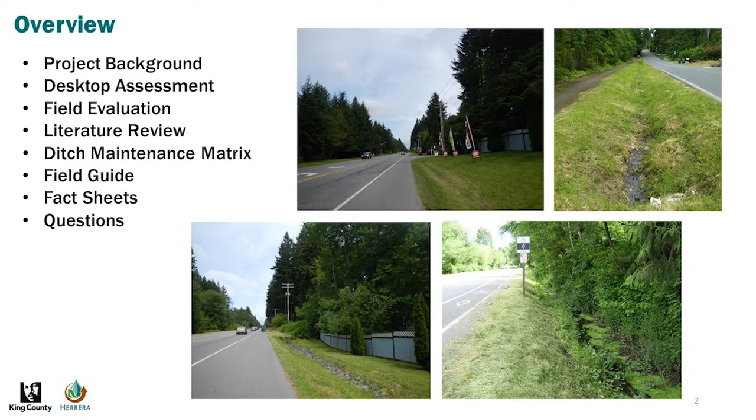This presentation will be covering the study processes and the various study work products, broken out by the following areas: the desktop analysis assessment, field evaluation, literature review, ditch maintenance matrix, field guide, and fact sheets.

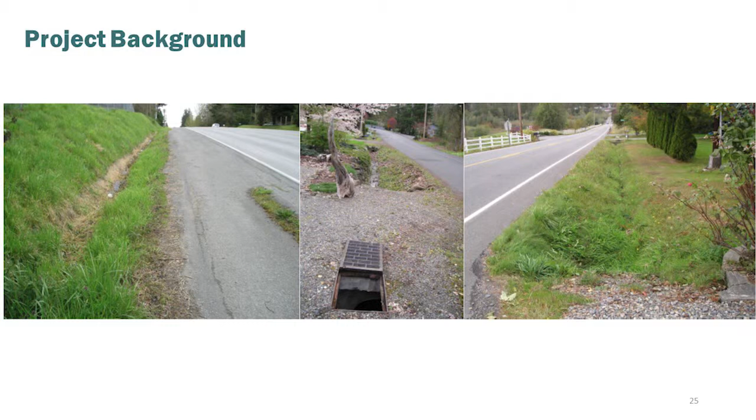Roadside ditch maintenance, this program, this study has been a pet project of mine for a number of years. I used to work in roads maintenance and was responsible for this. We often see this as an overlooked and underfunded aspect of stormwater management programs. Much of the work done to maintain roadside ditches is done through the perspective of maintaining the traveled surface or the roadside prism. But ditches are also stormwater conveyance structures, and for counties they comprise a large part of our conveyance system. For King County, over 70% of our conveyance system is roadside ditches.

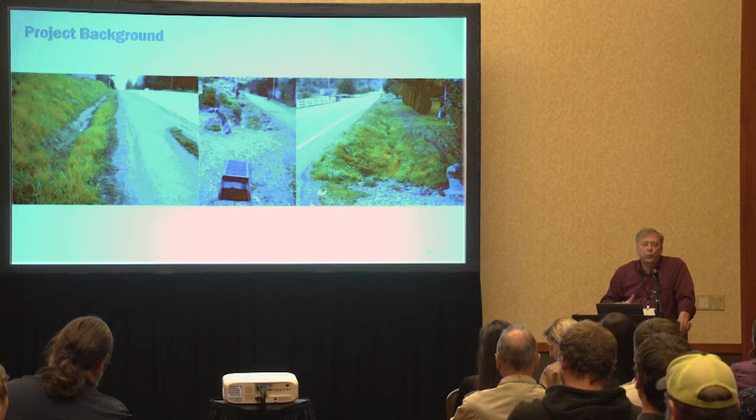The first step of this project was to conduct a literature review of local and national ditch maintenance resources to identify ditch maintenance practices. We then brought in King County road maintenance crews, and we involved Roadmap, a regional roads maintenance group looking at how to implement stormwater management practices for the roads departments. They filled in gaps that we had and reviewed all of the work products and processes that we were developing.

The next step was to develop a desktop assessment and field evaluation of a number of ditches in King County. The information gathered from the desktop assessment and field evaluation, along with the literature review, was used to develop content for the ditch maintenance matrix and the ditch maintenance field guide.

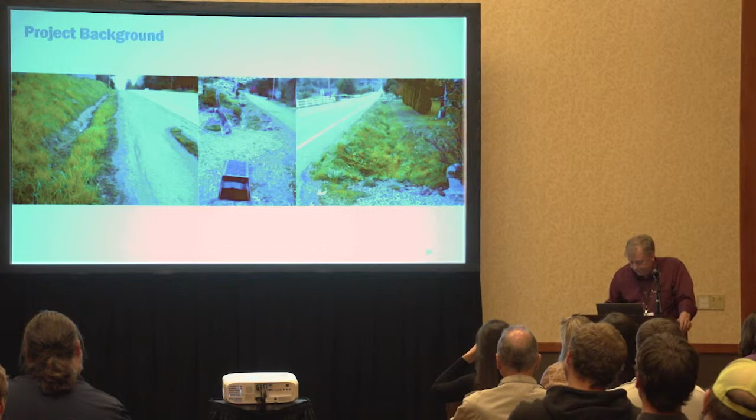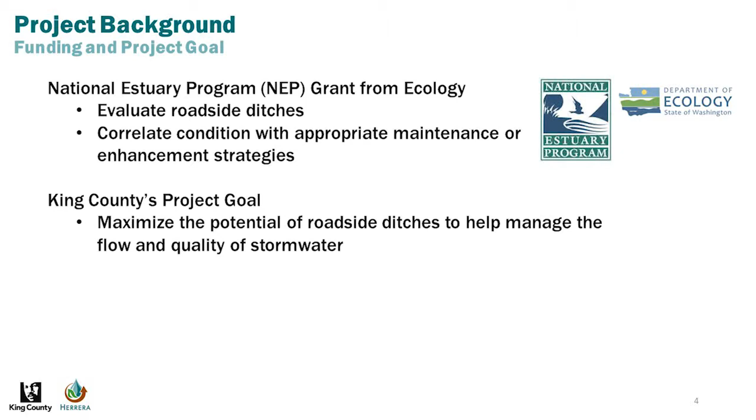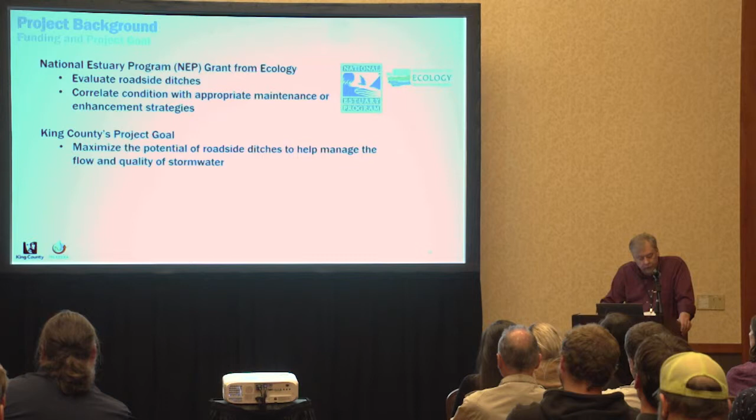The funding for this work came from the National Estuary Program, a grant from Washington State Department of Ecology, with the support of the Roadmap operations and maintenance personnel from Phase 1 and Phase 2 municipal permittees. They helped identify specific ditch characteristics, develop both a key that correlates ditch maintenance condition and hydrogeomorphic attributes with appropriate maintenance or enhancement strategies, and a rating system to help prioritize ditch maintenance projects.

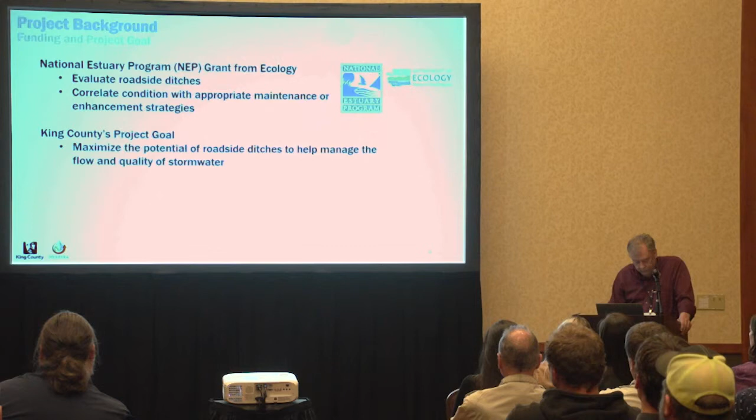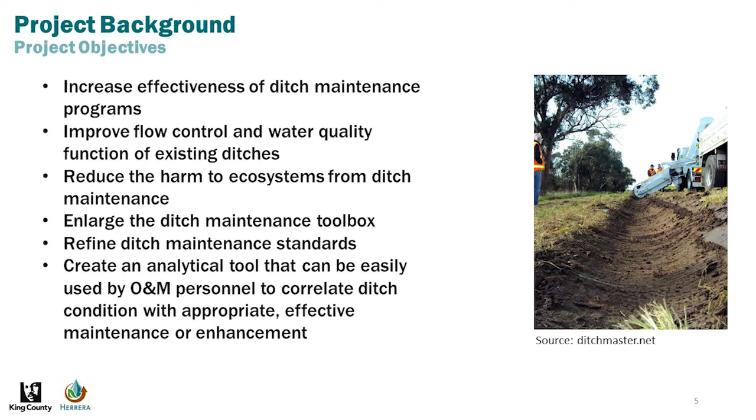Rebecca will go into much more detail on the results of the study and the tools that we developed, but the study was always focused on these elements: increase effectiveness of ditch maintenance programs, improve flow control and water quality function of existing ditches, reduce the harm to ecosystems from ditch maintenance, enlarge the ditch maintenance toolbox, refine ditch maintenance standards, and create an analytic tool that can be easily used by operations and maintenance personnel to correlate ditch condition with appropriate and effective maintenance or enhancement.

Our hope is to continue this work and to find additional funding to do further studies that would look at developing this program and include ditch maintenance retrofit approaches that would utilize roadside ditches for stormwater management actions.

And at this point, I'm going to turn the rest of the presentation over to Rebecca.

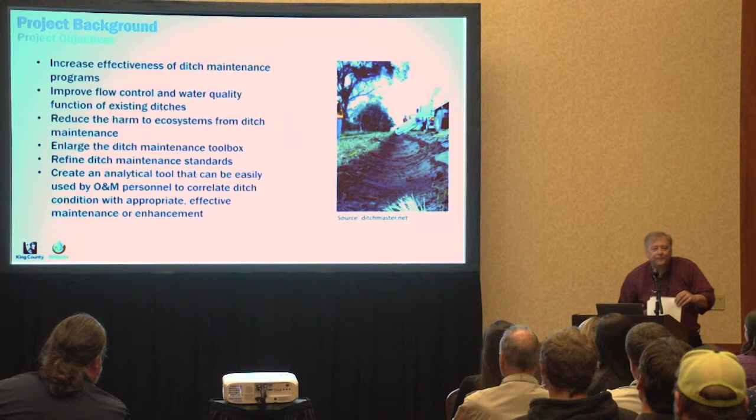All right, thank you, Doug.

So talking a little bit about our project background and our deliverables, this is laid out in 3 different tasks. Our first task on the far left was the inventory and assessment, which included developing a desktop assessment data collection matrix, a field evaluation data collection matrix, and also the literature review that Doug mentioned, which I'll go into more detail on in just a minute. The middle task, task 2, focused on a ditch maintenance matrix. And task 3 focused on the field guide and the fact sheets that we'll also be covering today.

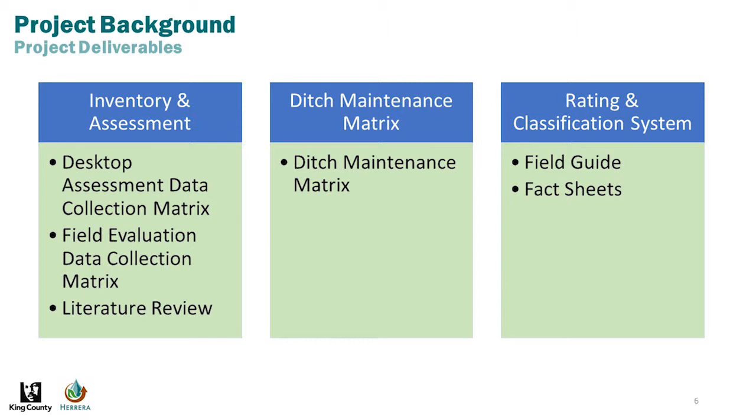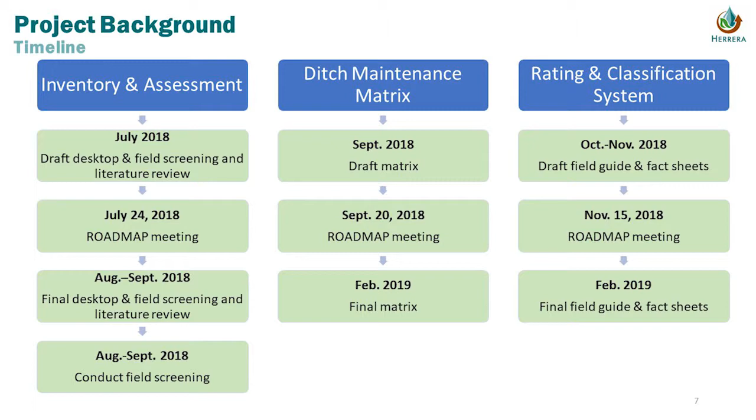Breakdown of the timeline: we started this project back in July 2018. The inventory and assessment piece was wrapped up by the end of 2018. The ditch maintenance matrix we also worked on in late 2018 and early 2019. And then the field guide and fact sheets was last fall, wrapping up at the end of February.

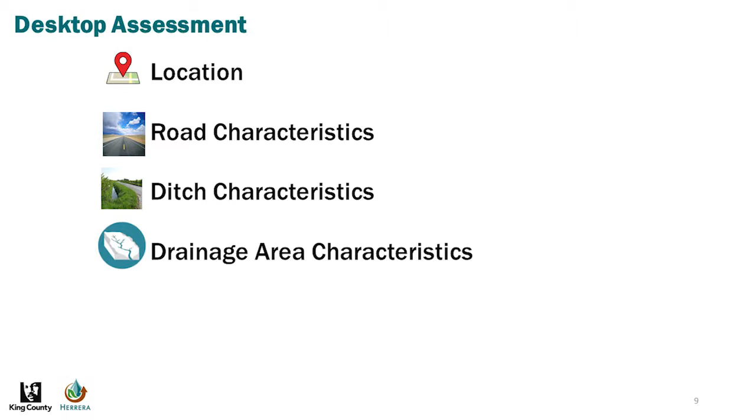So focusing first on the desktop assessment, I wanted to walk through some of the pieces of that. We worked on developing a list of criteria that we'd look at as part of the desktop assessment, which fell into 4 main categories: location, road characteristics, ditch characteristics, and drainage area characteristics. We worked with the roadmap group to develop a list of data that should be evaluated as part of each of those categories.

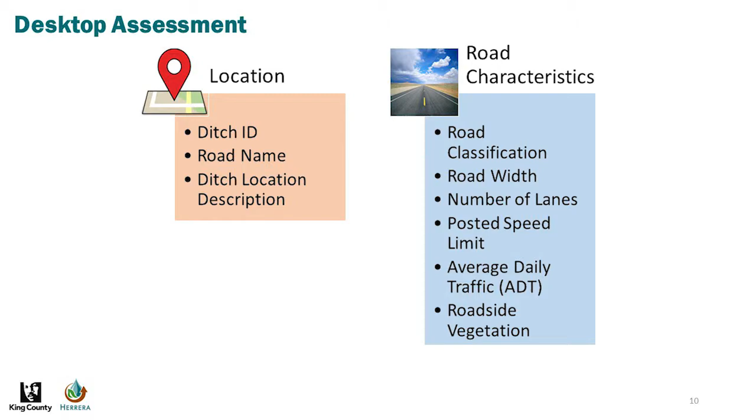Location is fairly straightforward: the ditch ID, the name of the road, and then the location of the ditch, because when you're looking at ditches you need to know which side of the road it's on, so that's an important classification. Looking at the road itself, just some basic characteristics about the classification of the road, the width, number of lanes, posted speed limit, average daily traffic, and roadside vegetation. The data set we were looking at did include roadside vegetation—that may be limited in other jurisdictions, but it's important to look at if that's part of your GIS data.

For ditch characteristics, we had a longer list to look at. Some of these things were actually included in King County's data set—this may be more limited for some of the phase 2 jurisdictions—but some helpful things to look at in terms of classifying your ditches include the length of the ditch segment, the bottom width, the geometry, the surface type, whether it's vegetated or not, property owner, and things related to maintenance. Also important is looking at whether it conveys natural drainage, if it's connected to a stormwater facility, if it's connected to a receiving water body, and if it's a direct discharge or not. That'll help you classify your ditch maintenance activities and prioritize them.

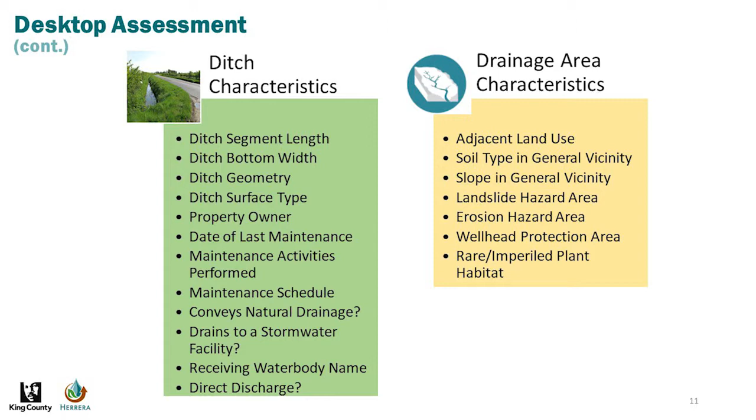For the drainage area itself, we looked at adjacent land use, soil type in the general vicinity, slopes in the general vicinity, whether there's a landslide or erosion hazard area nearby, wellhead protection areas, and rare and imperiled plant habitat. That was added based on discussion with our roadmap group, but it's a GIS layer that's publicly available that you can take a look at. So it's helpful to know that in terms of maintenance, to see if there may be something specific you're encountering.

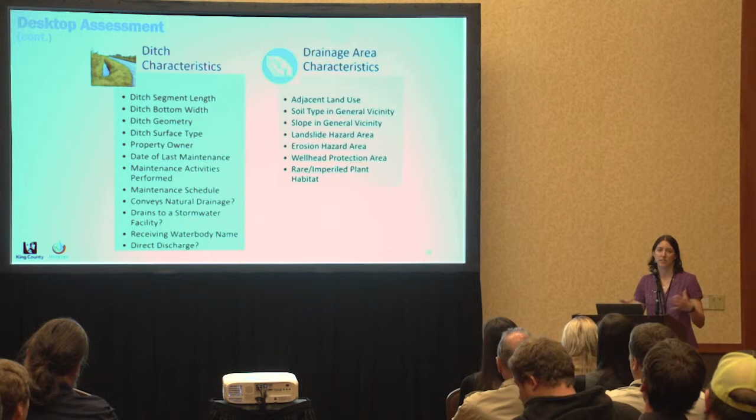One other thing I wanted to point out that would be useful is having the contributing area that drains to each ditch. That wasn't part of our project, but it could help you really assess those drainage area characteristics. What we ended up doing is just having a setback around the ditches, but if you actually had the drainage area to each ditch, you could classify within that drainage area.

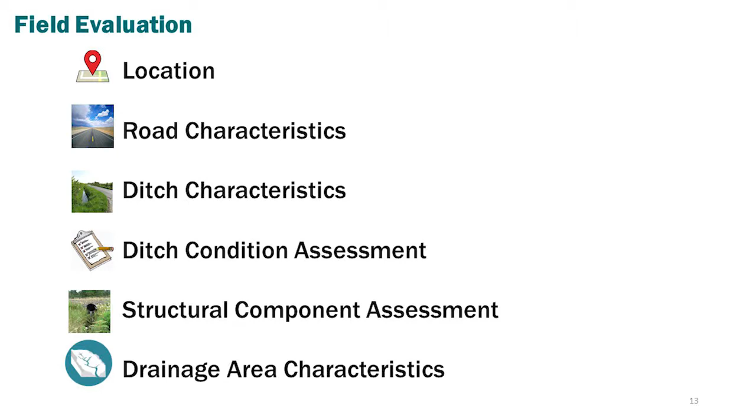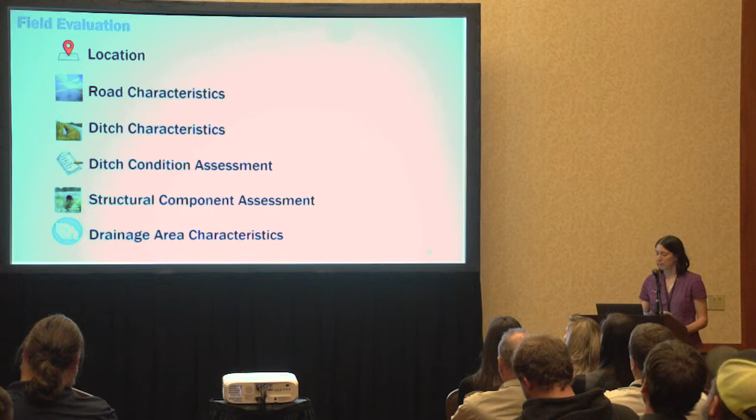So next I want to focus a little bit on the field evaluation. So here's what we're taking a look at in the field. Again, you see the overlap here: location, road characteristics, ditch characteristics, and drainage area characteristics. The two new elements are the ditch condition assessment and the structural component assessment. We worked with the roadmap group to take a look at what types of data we should look at in each of those categories.

Location information is the same as the desktop assessment. Road characteristics are also fairly similar, but just verifying when you're out in the field what the actual road width is, make sure that agrees with what you're seeing in the GIS data. If you can get information on the slope or drainage direction, that's often easier to look at out in the field. Road condition can contribute to what's actually getting into the ditch, and then also looking at the vegetation type. If you don't have that in your database, that information is good to collect out in the field.

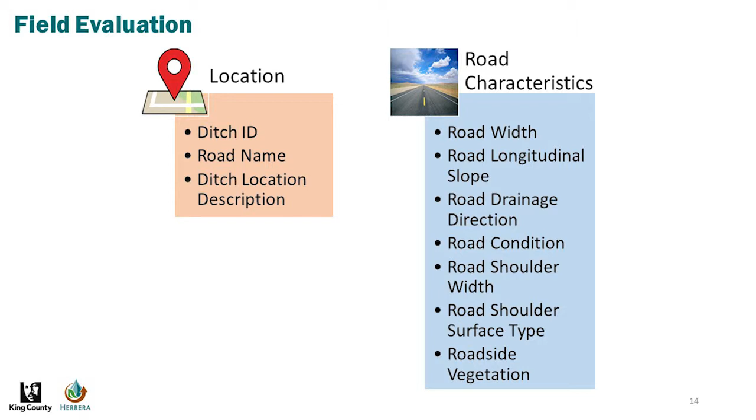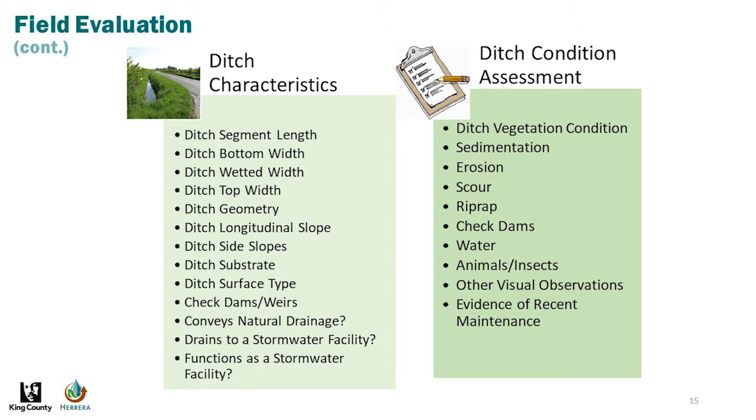Ditch characteristics again have some overlap with what we looked at as part of the desktop assessment, but really looking at if there is standing water in the ditch, looking at the wetted width, the geometry, slopes, and if there's any check dams or weirs and things like that. So some of that list does overlap with what you're looking at for the desktop assessment.

Ditch condition assessment, fairly straightforward there. You're looking at condition of the vegetation, whether there's any sedimentation, erosion, scour, things like that, evidence of noxious weeds, nuisance animals, so things like that to take a look at the condition of the ditch itself.

Structural component assessment, you're probably pretty familiar with that from your stormwater BMP inspections, but taking a look at the inlet and outlet and assessing if there's sediment and debris buildup, if there's any structural damage. And then surrounding features, taking a look at is there a sidewalk nearby or other things that we may want to consider as part of our assessment.

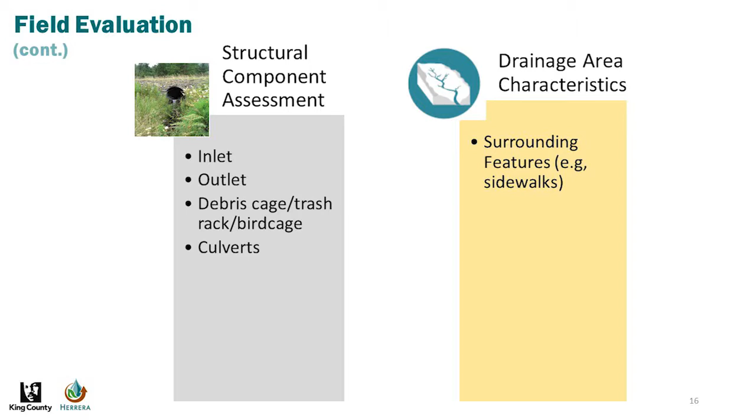Using that criteria, we took a look at 23 different ditches throughout King County, and we tried to look for a variety of different ditch geometries and ditch surface types and drainage areas and things like that. So we looked at a pretty broad selection of ditches all throughout King County.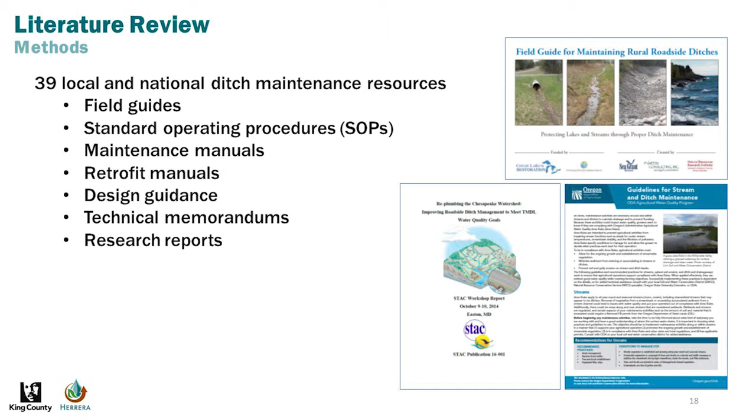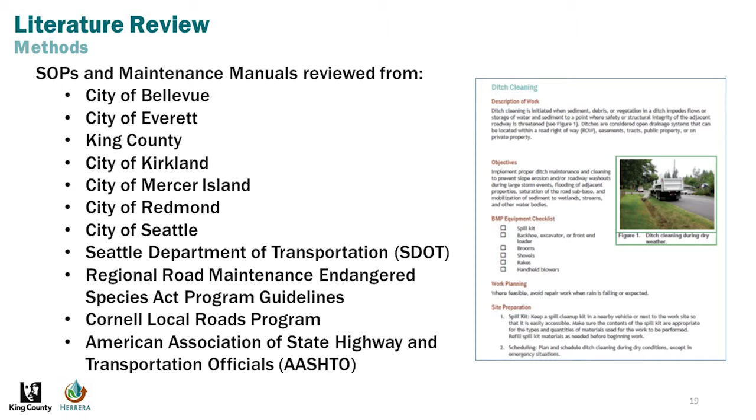Locally and nationally, we focused on SOPs and maintenance manuals from the following cities listed up here, as well as SDOT and some resources from AASHTO. These were requested through the roadmap group, and then also found by searching on the web for readily available ditch maintenance SOPs.

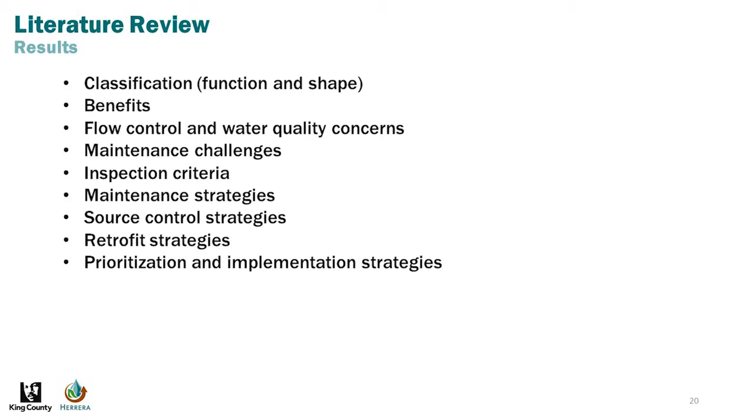For the results, here are the different categories that we looked at, and I'm going to focus on just a few of these today. So classification looked at the benefits, flow control and water quality concerns, maintenance challenges and strategies, and source control and retrofit strategies. We grouped into those 9 different categories and actually have a copy of that up on the table here if you want to come take a look.

What we found is that none of the resources that we looked at actually linked ditch classification and/or condition with specific maintenance and remediation needs. So that was a little disappointing. We were hoping we'd find some golden key to what ditch maintenance should be and what should be done there, so really we had to lean pretty heavily on roadmap for that input.

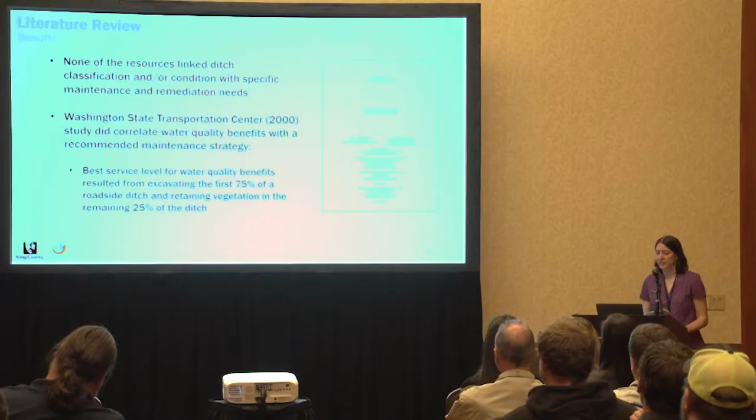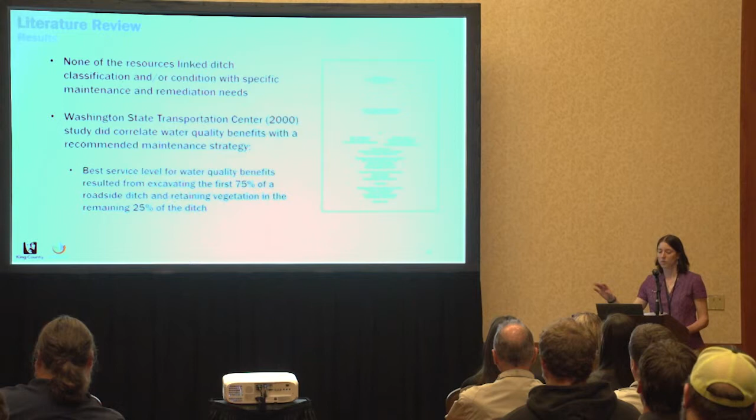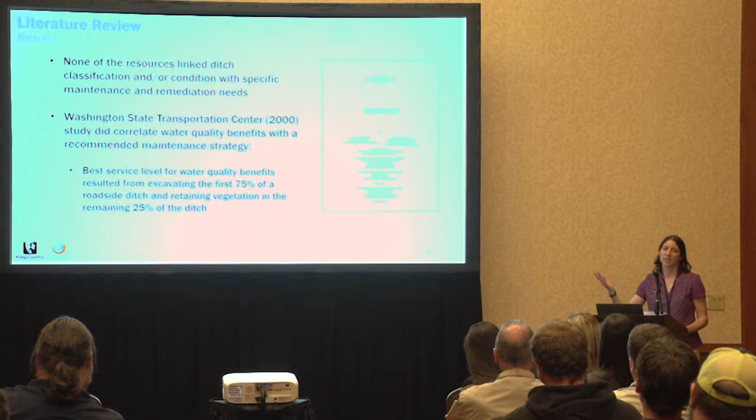We did find one study that correlated water quality benefits with a recommended maintenance strategy, this Washington State Transportation Center study. They found that the best service level for water quality benefits resulted from excavating the first 75% of a ditch and retaining vegetation in the remaining 25%, then coming back the next year and excavating that remaining 25%. They found that basically just denuding the whole ditch of vegetation would actually cause more of a water quality issue than cleaning that first 75%, leaving vegetation in the latter 25%, and then coming back and maintaining that later.

There was also a good field guide example from Cornell, a field guide for maintaining rural roadside ditches, and that was a really good resource that we looked at for this project.

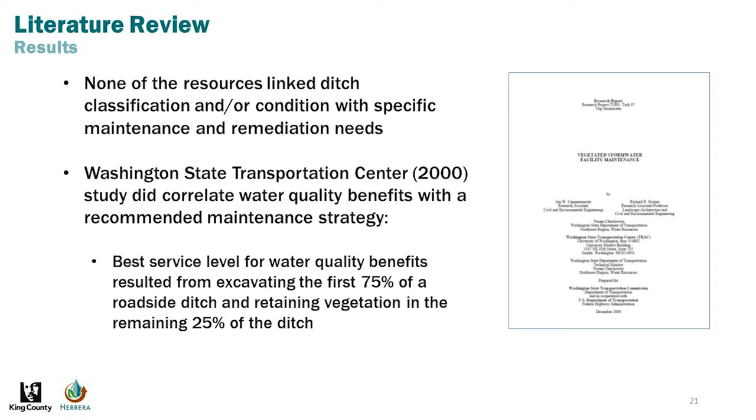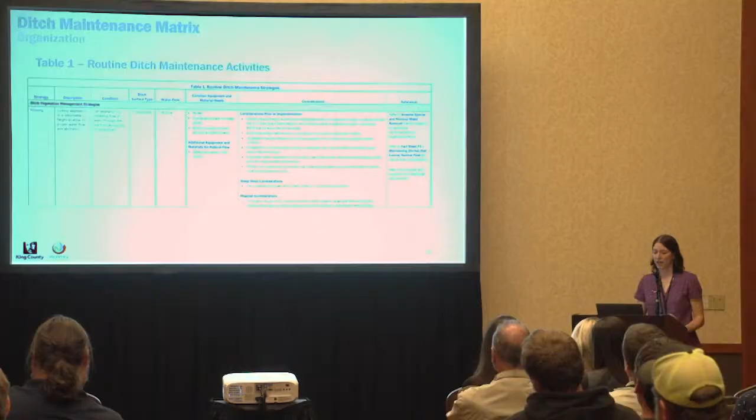Using all that information pulled from our field evaluation and desktop assessment, along with input from Roadmap and the literature review, we developed a ditch maintenance matrix. That's broken up into two different tables.

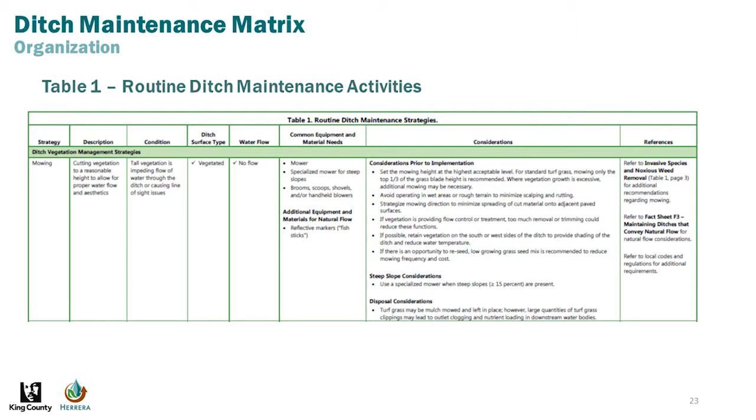Table 1 focuses on routine ditch maintenance activities. It includes, moving from left to right, the strategy, description, condition, ditch surface type—vegetated, bare soil, or even paved—water flow, whether there's flow, no flow, or standing water, common equipment and material needs, considerations, and references. We'll go over these in more detail related to the field guide.

The second table focused on corrective ditch maintenance activities, and after some debate with the roadmap group, this is where we placed ditch cleaning, because ditch cleaning is something that shouldn't be done on a routine basis. It should be done as needed, but vegetation management is really what you should be doing routinely, while ditch cleaning is more of a corrective maintenance activity.

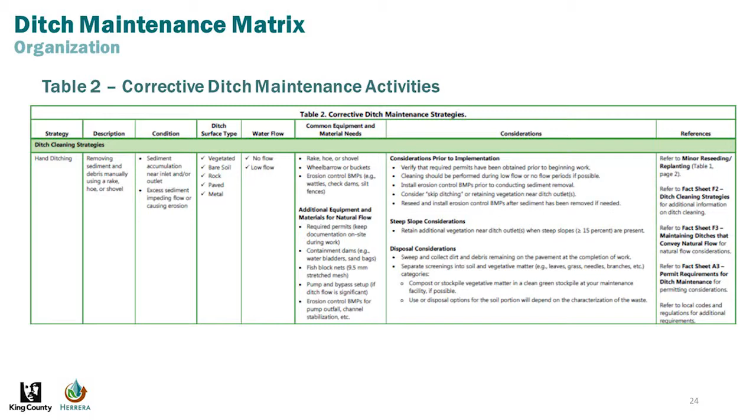The ditch maintenance activities under routine maintenance included mowing, brush cutting, minor reseeding and replanting, weed control, invasive species and noxious weed removal—that was the bulk of the routine activities. We also had cleaning inlets and outlets and nuisance animal and insect control, also important elements of routine ditch maintenance.

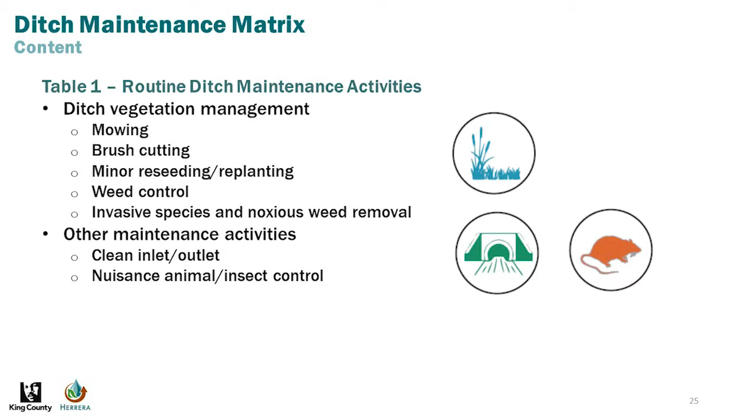For corrective ditch maintenance, this is where our ditch cleaning activities fell, grouped into hand ditching, bucket ditching, and shoulder ditching. This is also where we have ditch stabilization, minor ditch reshaping, regrading, and major replanting and reseeding. Notice the minor was under routine, while major replanting and reseeding is under corrective actions.

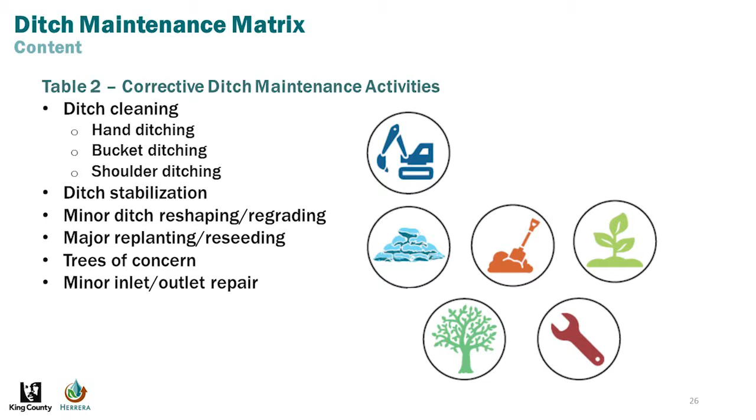Trees of concern—any hazard trees that need to be addressed—and then minor inlet and outlet repairs.

That information folded into a more graphical guide for field crews. We have a couple of copies we'll circulate that includes the field guide and each of the fact sheets, so take a look. I'll also have a link at the end—all these resources are available online on King County's website now.

This is the roadside ditch maintenance field guide. It started off with a goal of being 10 pages, and we ended up at 18 pages, but not too bad to include all that information in a succinct way. The first page is the introduction. Pages 2 through 9 focus on routine maintenance, and 10 through 18 on corrective maintenance.

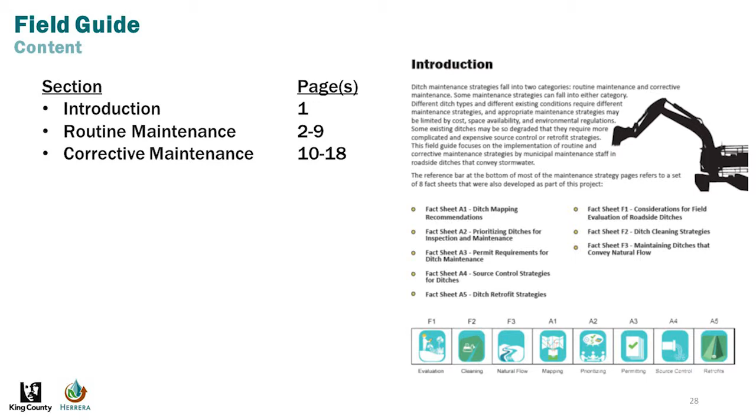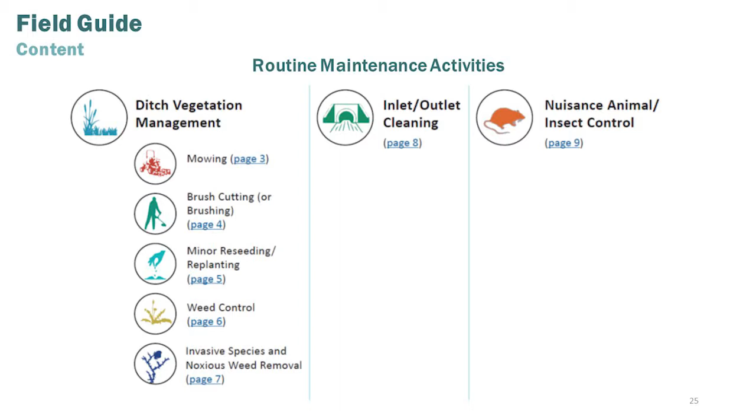Similar to what I walked through on the matrix, it's a very similar format, with one page on each maintenance activity. So mowing, brush cutting, minor reseeding, replanting—each have a full page on that activity, kept to a one-page format. Corrective maintenance follows the same approach, broken out in that section as well.

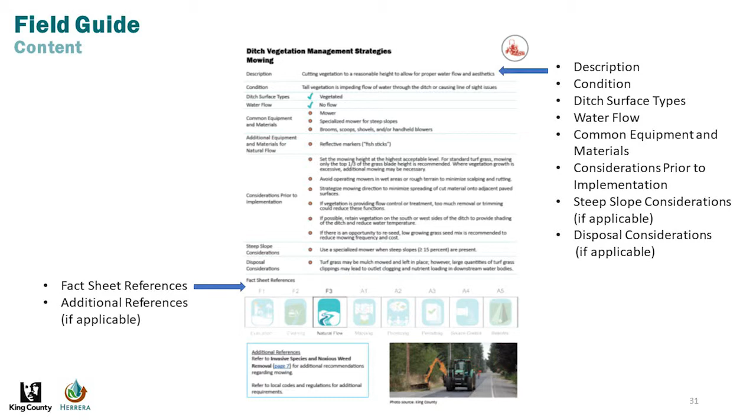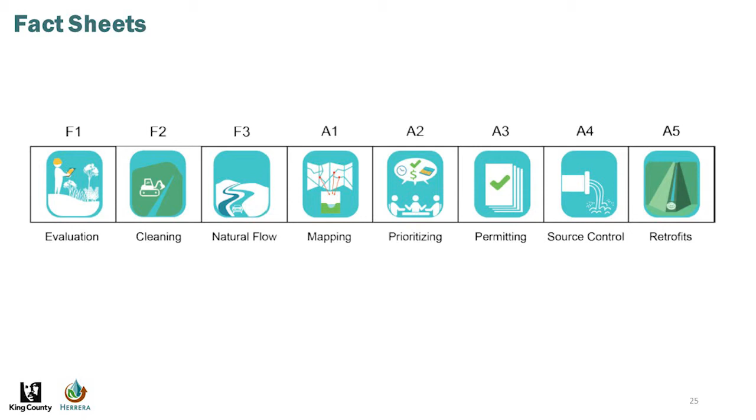The fact sheets definitely supplement the field guide. Obviously in an 18-page document you can't cover everything, so we wanted to make sure we focused on additional content in the fact sheets. We originally started with 6 fact sheets and then added the source control and retrofit fact sheets based on feedback from the roadmap group. I'll walk through what each of those are.

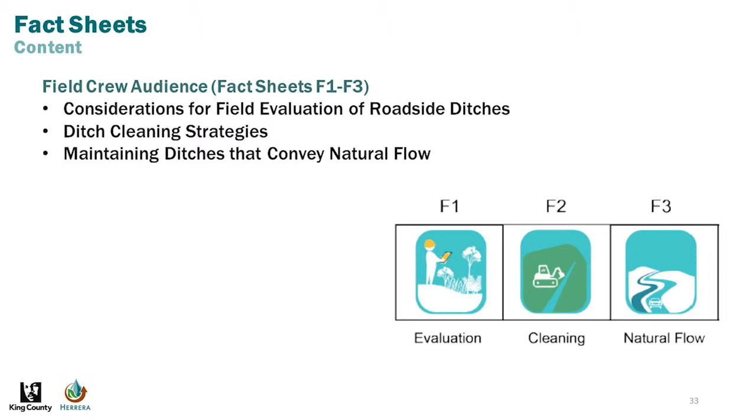There are 3 fact sheets intended for a field crew audience. The first looks at considerations for field evaluation of roadside ditches. The second looks at ditch cleaning strategies, which has a lot of overlap with the field guide. The third is maintaining ditches that convey natural flow.

So the first one of those 3, intended for the field crew audience, covers your data collection methods. If you want to do mobile data collection, some tips in there for that. Preparing field equipment and how you assess ditch conditions. So that's a 5-page fact sheet, a pretty concise read, but a lot of great information.

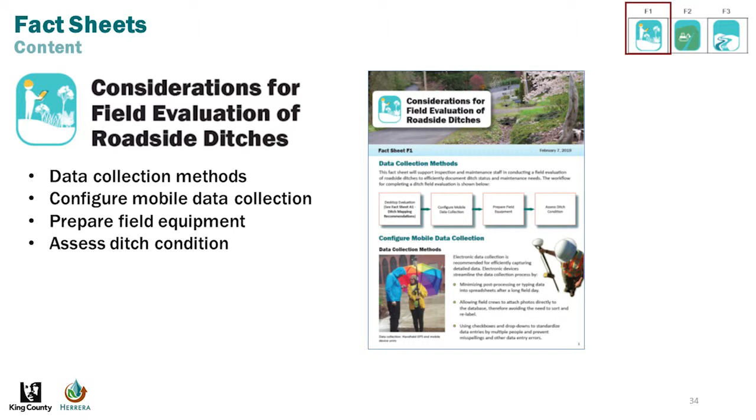Ditch cleaning strategies, as I mentioned, is a shorter one, a 3-page fact sheet that does overlap a bit with the field guide, but still some good information in a succinct form. What is ditch cleaning? Where is it applicable?

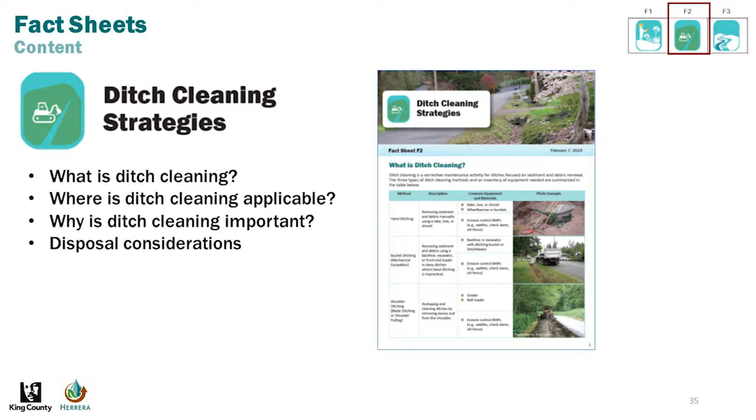Why is it important, and some disposal considerations to think about. And then the third one for field crews, this is a topic that came up, and I know this morning too, we were talking about collecting GIS data. How do you maintain ditches that convey natural flow? There's a lot of considerations that go into this. This is a 4-page fact sheet that covers the topics highlighted here and what some adjustments you may need to make for doing maintenance in those types of situations.

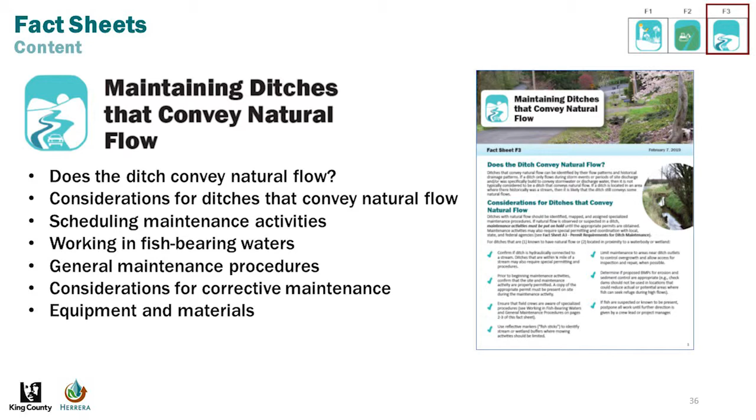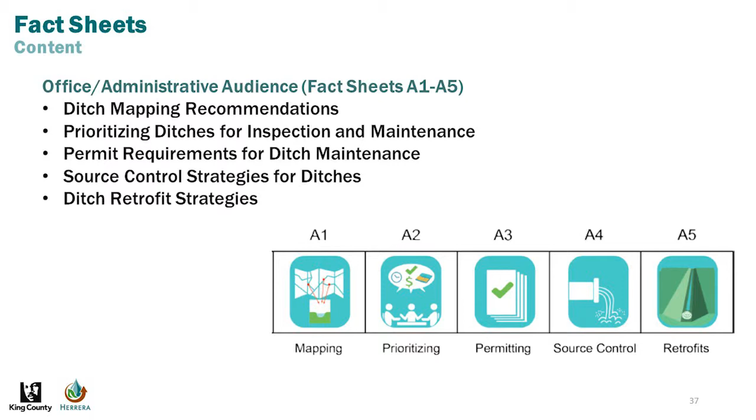For the office administrative audience, we had 5 different fact sheets. Stepping down through the list here, I'll walk through each one of these. The first is ditch mapping recommendations, and this ties into Jennifer Schmidt's talk this morning. This is a 5-page fact sheet that walks through why ditches should be mapped, how to map ditch segments, building a centralized database, and desktop analysis. This is a really important tool for those of you looking at collecting more robust ditch data for your GIS database, so there are some recommendations in here you may want to take a look at.

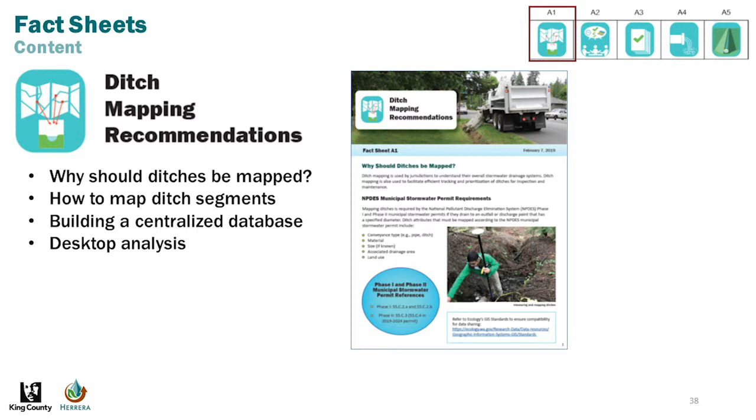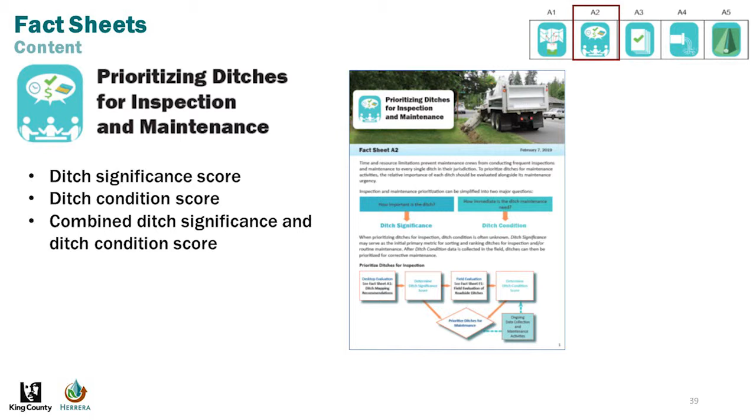Prioritizing ditches for inspection and maintenance. This is also a really great resource. There's a 7-page fact sheet here that talks about assigning a ditch significance score and a ditch condition score, and then a combined ditch significance and ditch condition score.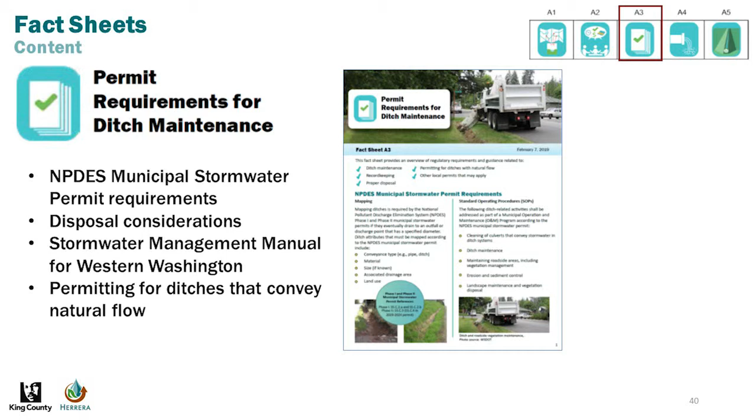And then the last 2 that we added: source control strategies for ditches. This is the shortest one out of the pack, but obviously very important. Controlling sources before they make it into your ditch would obviously improve the water quality of the ditch if you can address those before they get to the ditch. So why is it important and when is it needed, and some additional resources to take a look at there.

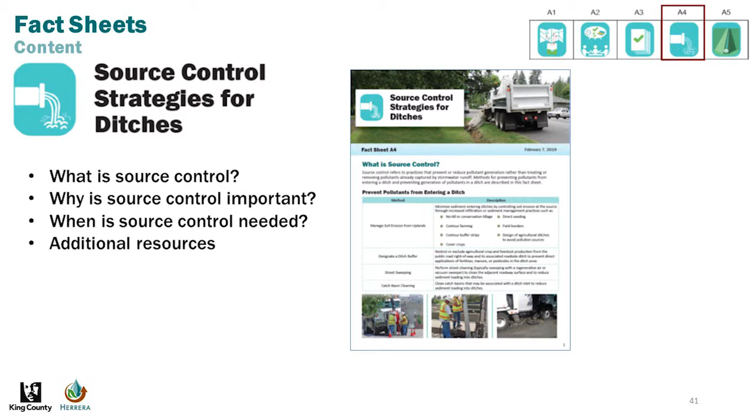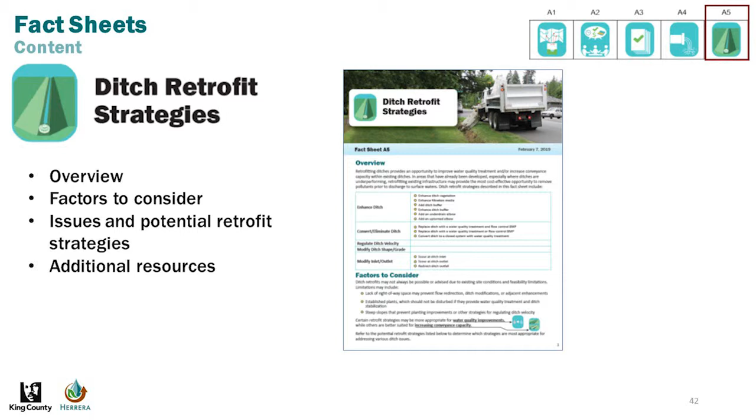And then the last one of the pack is the ditch retrofit strategies. This ended up being a 6-page fact sheet. Really, this is what Doug mentioned as kind of the driver for future projects. Obviously there's lots of great ideas here to consider, some issues and potential retrofit strategies, and there's some great information in there drawing a lot from what Kitsap County started with their ditch retrofit manual as well.

So all the materials developed for this project just got posted on Friday, so you can now download them. It's a longer URL, but the short version, kingcounty.gov/ditches, will take you right to that page.